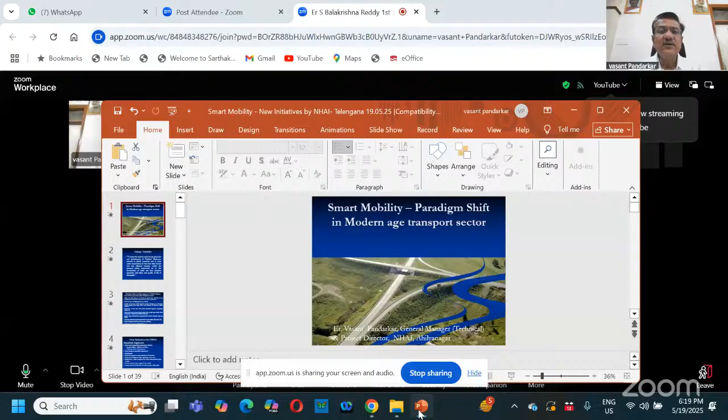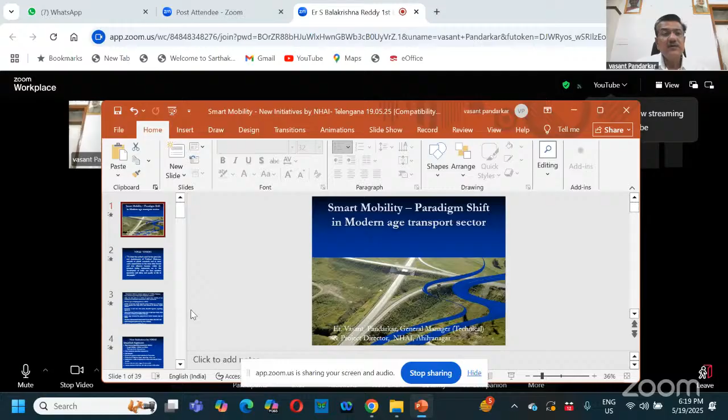Today's subject, as we have chosen, is smart mobility paradigm shift in the modern age transport sector. As I work with National Highways India, our vision is to meet the nation's need for provision and maintenance of the national highways network to global standards and to meet users' expectations in the most time bound and cost effective manner. This is the vision the NHAI chairman has put up to all the engineers of NHAI to work on this plan.

Now moving to today's subject, there is a paradigm shift in design aspects of NHAI projects. Earlier, when we worked with the PWDs and previous state PWDs, the main concern of designing was to minimize the project cost, to have minimum cost effectiveness. Also availability of land, availability of materials, and all other resources available, such as water and manpower. These are the main constraints we had to think of while designing projects.

If I think of project cost, we would go for right angle bridges instead of alignment angled bridges, so minimum length of the bridge should be considered, that's why the project cost would be down. We would go for alignments considering balance cut and fill, meaning whatever material I get from cutting, I would use in embankment portions. That's why I had to go through the alignment in contour fashion. More or less, we find sharp curvatures, sharp bends were also considered during earlier conception of highways. These are constraints we had to face, and accordingly we faced so many accidents, so many human losses on the highways because of these constraints.

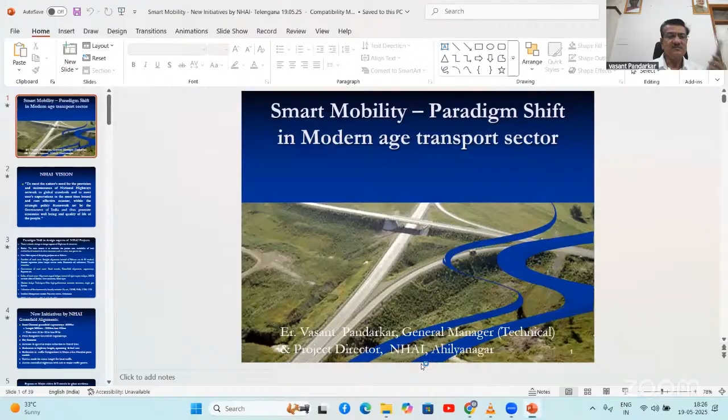Yes, so now I'm also seeing, and you are also getting it, full screen. Okay, so our first concern is to provide a design in such a fashion that there should be comfort to the road users. So our main asset is the road users, and their comfort is very important for the NHAI.

Accordingly, what we do is try to straighten the alignments as far as possible. If it is not possible, then we go for curvatures as per the IRC norm, that is, radius should be more than 500 meters. So it gives comfort to road users instead of considering the balance for cut and fill method, wherein we require more resources and more cost in designing. Instead, NHAI has decided we'll provide straight alignments and alignment bridges, to provide comfort to the customer.

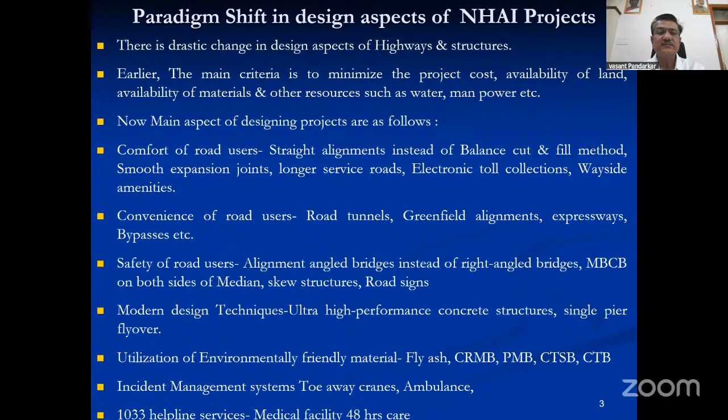New initiatives, as I said earlier in the earlier slide, greenfield alignments. So nowadays, under the Bharatmala and under some NHDP phases, NHAI has proposed greenfield alignments. So one of the projects I am associated with, or I am part of that design, is the Surat Chennai Greenfield Expressway. This project will start from Surat and connect to Chennai via the Greenfield Expressway.

It is totally greenfield and no brownfield. That means this new area is being acquired and constructed. The project cost is around 80,000 crore. Earlier, the length of this project was 1,600 kilometers.

However, after the construction, it will become 1,290 kilometer, providing a 310-kilometer reduction in the length itself. This length reduction will provide a saving in the fuel cost, saving in the operating cost of the transport section, and again it will save in the time itself. Nowadays it takes 32 hours to go from Surat to Chennai. Now time will reduce to 18 hours, that means 14 hours will be saved by the road users. So these are the key features now being provided by the NHAI itself.

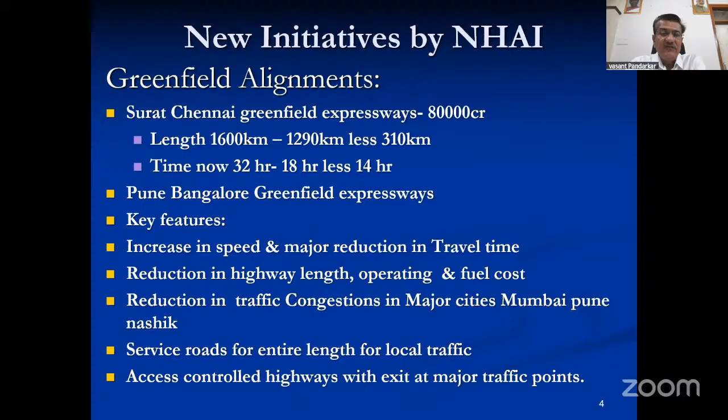So bypasses are being conceptualized under the NHDP Phase 7. The ministry has provided 700 kilometers of ring roads and bypasses, with an estimated cost of 16,680 crores. You will find that bypasses are being considered at very major cities. These bypasses are taken up by the ministry under central government funds, along with the acquisition of land. So it will reduce the traffic congestion within major cities and urban areas.

Again, it will provide another feature: cities will grow along these bypasses, as we have seen in Pune city itself, where earlier the bypass was considered away from the city itself. Now you'll see that the bypass came inside the city, and it has outgrown beyond that bypass. So new areas are being utilized for the growth of the cities also.

Tunnels, as I discussed, are being provided to avoid traversing the hilly portion and to provide easy access to all commuters, reduction in travel time, fuel cost, and major accidents. As I told, there are very frequent major accidents during the Pune district at the Khambataki portion. You will find so many major accidents during Pune to Mumbai also, and this provides reduction in pollution.

Longer flyovers. What happened actually is there is always a very large critique on the part of the NHAI that when we cross the city or smaller or medium towns, we provide some underpasses. These underpasses are around 30-meter wide, 40-meter wide, or 50-meter wide. But on both sides, we provide approach to these underpasses, and these are around 300 to 350-meter length on both sides. So there is a great difference of around 700 to 800 meters in the city.

You cannot cross, and this is in the main part of this area. So people always ask for flyovers so they can traverse from one side to the other, because shops and commercial organizations are there, and local people have to go from one side to the other. That's why there is a large demand from citizens for flyover type structures, and sometimes it is possible because of cost constraints, sometimes it is not possible.

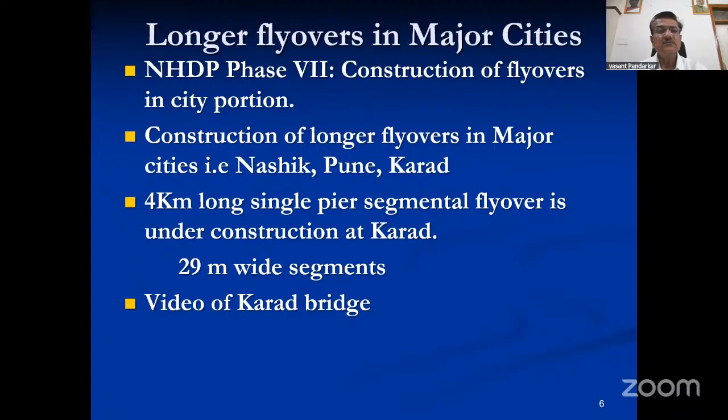Now a new technique is being used for design of the bridges itself - ultra high performance concrete is being used. This is a new technology, which is patented technology, came from Malaysia, and now we are using it here in India also. Earlier, we would go for 25 to 30 meter long bridge spans. Now, because of this ultra high performance concrete, they are manufacturing these bridges in the factory itself under controlled environment, and with this unique technique, they can go up to 70 meter larger spans, and because of that, columns are being reduced.

There is considerable increase in speed of construction. Though the initial cost of using these longer spans is around 30% excess, because they are using M50 to M150 grade concrete - very high density concrete with innovative techniques - longer spans give us reduced number of piers, reduced construction time, and reduced joints. It reduces the construction cost and time also.

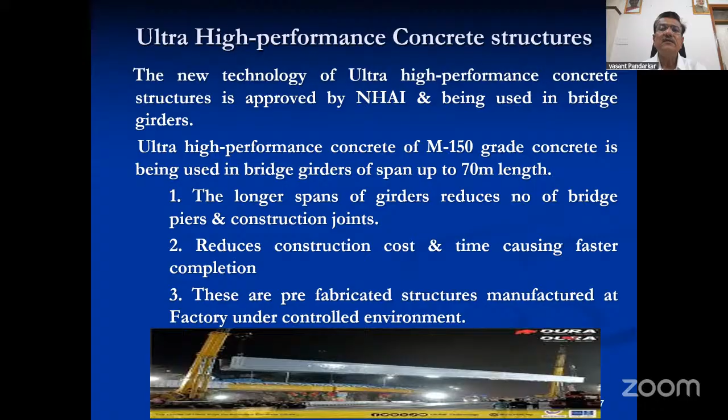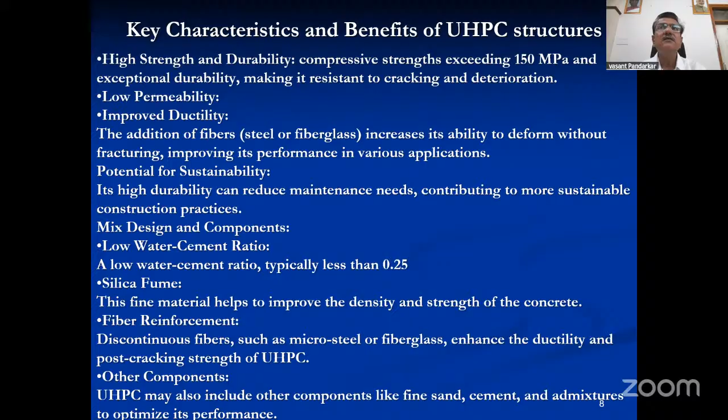Key characteristics of these UHPC structures: strength is high, as I already told you, it is 150 MPa, with improved ductility and potential for sustainability. Their design life is about 60 years, which gives durability for a longer time span.

In the mix design, a very low water cement ratio is used because they do not use conventional reinforcement - they use steel fibers and silica fume as aggregates, very fine aggregates, in manufacturing such structures achieving 150 MPa concrete, giving very high strength. So these girders are thin structures having very less weight, making them convenient for transportation and lifting.

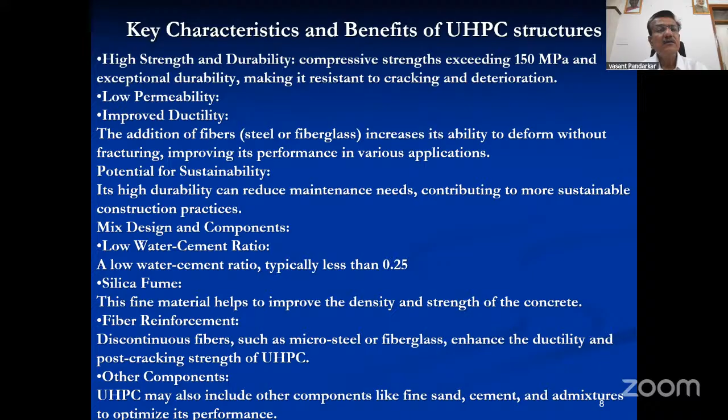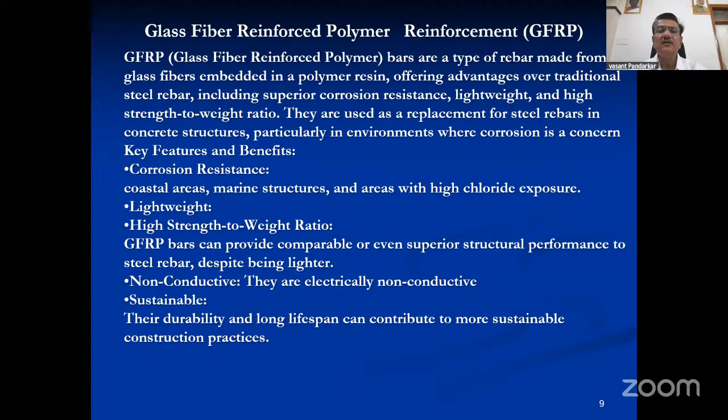Another new technique being used is glass fiber reinforced polymer. Nowadays, you may be aware of this reinforcement - glass fibers are used as reinforcement. These are corrosion free.

These are being manufactured at factories and supplied. Nowadays this is being used by NHAI in the Kolhapur to Belgaum section, but not as reinforcement - it is used in distribution and drainage structures, because they have good compressive strength but less tensile strength. That's why they are used in limited parts of the concrete, mainly in compression.

That means your distribution bars are being used in drainage structures also, and their bending stress is again very less. That's why they are trying to use them as main steel also. But these steels are very lightweight - a single person can lift 2-3 bars at the same time and carry them and use them on site itself. No corrosion, no special treatment is required. So these fibers are authorized for use by the IRC also.

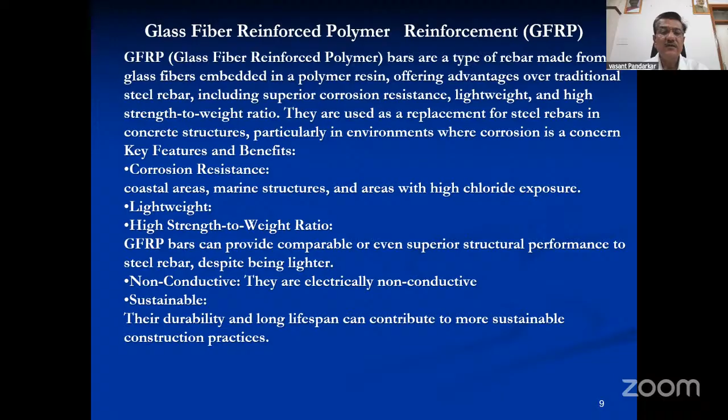Nowadays, instead of giving the NCR to the contractor directly by our offices, it is being delivered by the data lake itself, and they have to rectify within 48 hours. If they do not rectify, a penalty is imposed on the concessionaire automatically.

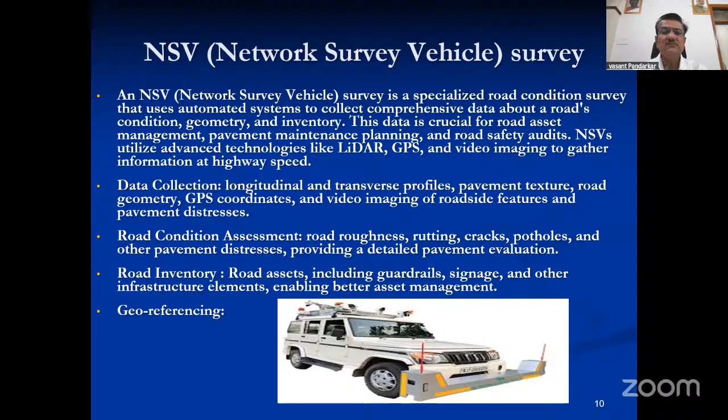Now this documentary proof is there showing what was done this month versus the earlier month. They provide both videos, last month's and the current one, side by side, and we ourselves can find the difference using the close-up images captured in these drone videos. We can find the road condition and what work has been done during the month itself. This is part and parcel of NHAI's regular monthly progress report, the MPR, and it has reduced litigation and further arbitrations and damage claims.

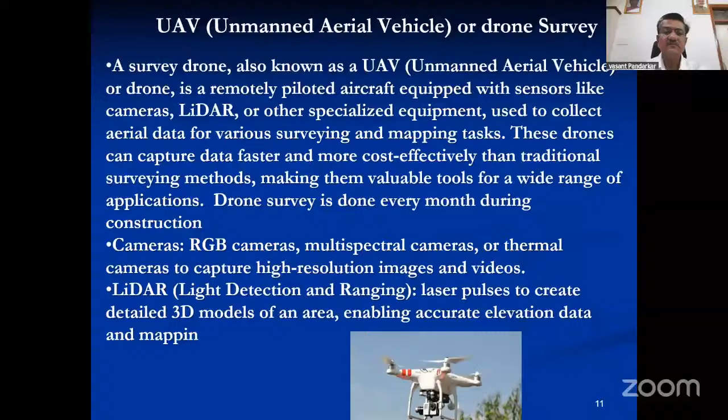Road safety is now a prime concern for our minister. He is very particular about this, and his motto is that we should bring down our casualty ratio to zero itself, but at least 5 to 10% lesser.

A committee is being constituted under the chairmanship of the collector of every district - the road safety committee. NHAI officers, PWD officers, the collector, SP of the district, and RTO are all part of this committee, and they meet every month. Public representatives, MPs, are the chairmen of this committee.

They give inputs on what is needed - there are some black spots, and they give solutions. They have some funds also, and they give the solutions. If not, then we give it to our headquarter. Our headquarter has given special funds to the accident black spot removals.

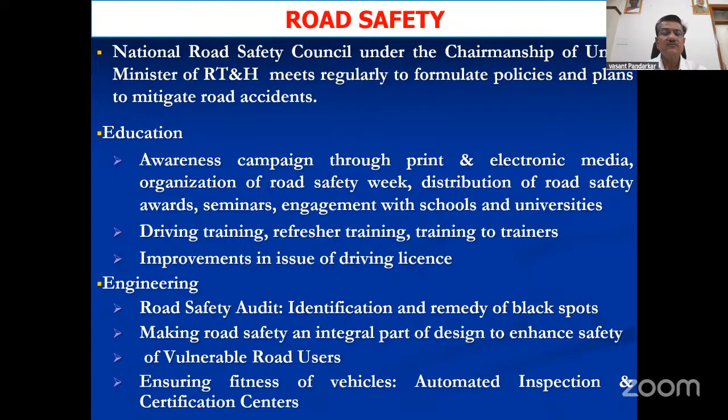Enforcement is a part of the RTO. They are providing speed guns, interceptors, and again, as project director, I am the road safety highway administration for the highways under my jurisdiction. So we have some quasi-judicial powers also, to impose fines on violators of road traffic.

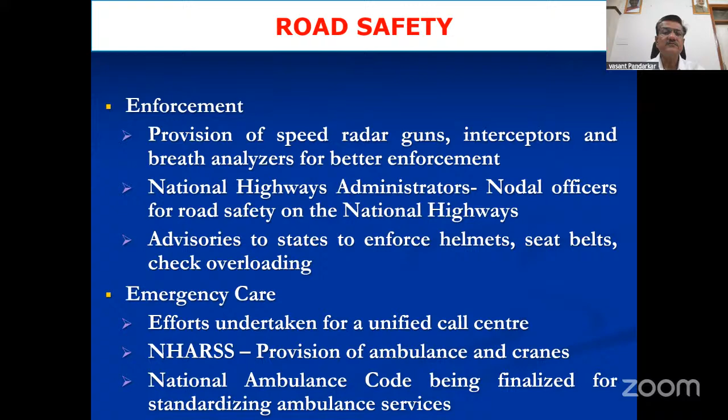Emergency - national ambulances are being provided. Emergency care is also there. Road safety awareness.

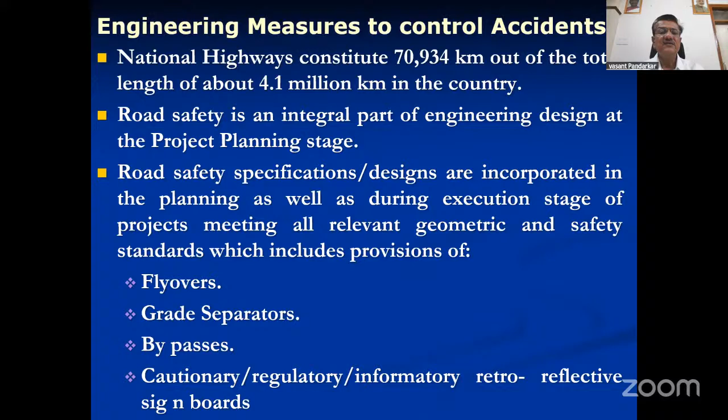So what we do is provide a grade separated structure - that is flyovers, grade separators, underpasses to segregate cross movement, cross traffic, and bypasses, as we have already discussed.

Railway overbridges - again, there is a memorandum of understanding between the National Highway Authority and the Ministry of Railways, that if we cross the railway line, we will remove the level crossing of the railway at the expense of the NHAI, to avoid any cross traffic of the railway and the highway. So we provide the ROBs.

They sanction our ROB, we construct our railway overbridges. At the same time, we additionally remove one level crossing within some 5 kilometers on both sides of the ROB, if it is there, at the expense of the NHAI, providing the facility for the railways to remove that. In return, they will not take any charges for our design approvals from the railway itself. So this is a both-way thing, railway and the NHAI.

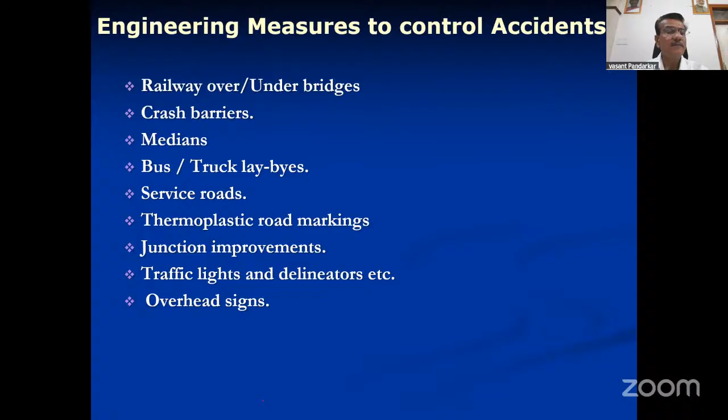Now this is the main concern - black spot removal. NHAI, or the ministry, has given a very large concern to the removal of black spots, and a protocol has been designed. A black spot is a short stretch of 500-meter length we consider, and if five accidents happen within 3 years, then it is declared a black spot by the ministry, or a single accident with more than 10 fatalities at the same point within a year. So it is declared by the ministry as a black spot.

There is a special provision for the improvement of these black spots by the ministry. Special powers are given to the regional officers - up to 50 crore are empowered to the regional officer to take up work to remove these black spots. Some funds are also given to the project director itself to take up safety measures at the black spots. So prime concern is given to this.

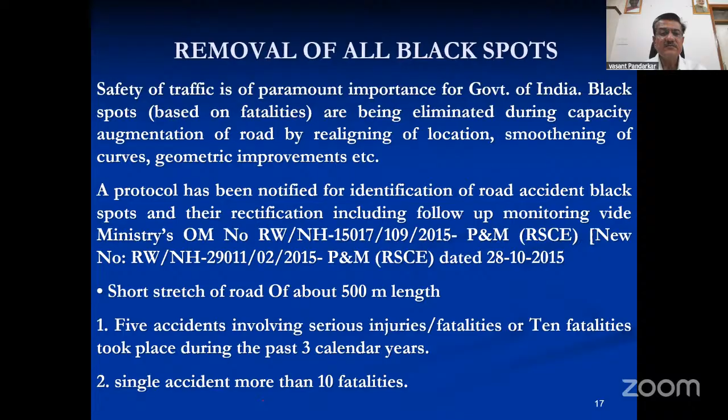A new technique called white topping is being used by NHAI. If we go for concrete pavement structures, it is a somewhat costly affair. Our national highways cost around 22 crore per kilometer, or nowadays 25 to 27 crores per kilometer.

So it is a costly affair. Instead, if there is an existing black top road and we want to provide good pavement to road users, we can go for white topping, because the base is already compacted and consolidated. No additional compaction is required. That's why with white topping we can go for thinner thickness. Earlier, for regular concrete pavement, we required 300 or 370 thickness.

Instead, we can now save and go for white topping with 180 thickness. For ultra thin, up to 100 we can use. This will save cost and construction time. But one feature is that panel size is very small, 1.25 meter by 1.25 meters, or 1.5 by 1.5 meters, to address the tensile stresses of these pavements.

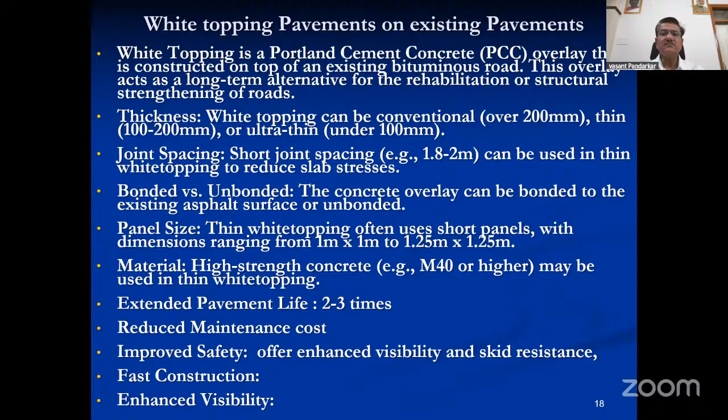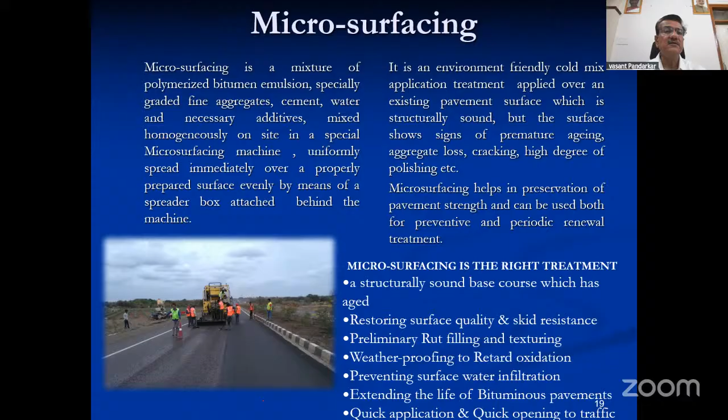Microsurfacing is used for removal of pavement distresses. If potholes or raveling are there, we use microsurfacing, a very fine technique. Bitumen emulsion and fine graded sand are used for this. It gives a good surface to traffic.

Now, electronic e-toll collection - for the last 2-3 years we have been organizing this, and now everyone is accustomed to e-tolling. Everybody has a FASTag and money is deducted from the FASTag itself. Now it is a settled thing. Earlier, when we started this 3 years before, we faced so many difficulties, portal difficulties, bank difficulties. Now it is running smoothly. Nowadays we have 94% or nearly 95% e-tolling.

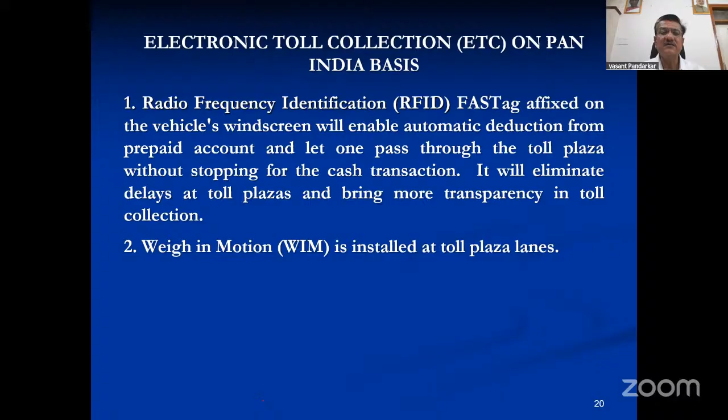Very rarely we use cash collection, but now the ministry has imposed that if you go for cash toll payment, you have to pay double charges. So people do not go for that. It is now a settled thing.

The use of spatial technologies - we have an MOU with the Indian Space Research Organisation for providing satellite pictures of our highways. It is useful for land acquisition. We can take out these pictures and identify structures affecting the alignment, and find out green cover and other things. It is useful for land acquisition and road condition development.

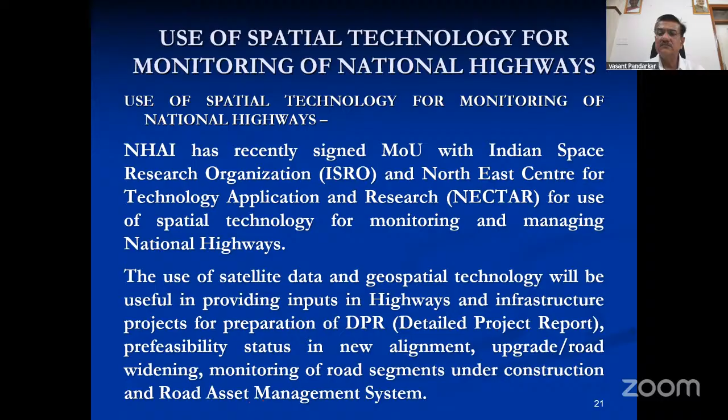Green highway policy was launched by the ministry on 29th September 2015. We provide median plants between the two main carriageways - a green cover of median plants of 1.5 meter height. Shrubs are monitored and maintained by NHAI, and we have avenue plantation. We plant 5 times the number of plants that we cut during construction, in special places we have acquired for this green cover.

These are the median plantations, as shown in this picture. It is duly curated by our plantation experts.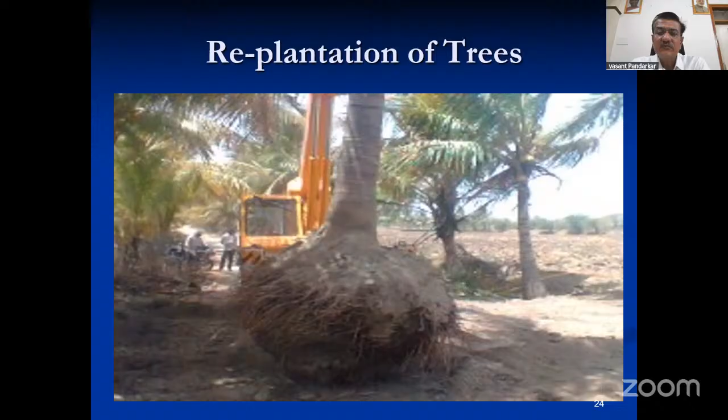This 1033 helpline is very unique. Everybody can use it. On the highway, we have put up information boards with the 1033 line. If you find any road user in distress, he can call 1033. It will go to our control room, which will connect directly to our officials, toll plaza officers. This will provide help - if there's an accident, an ambulance will be provided. If a vehicle is stranded on the road, they will provide a crane to remove it, and within an hour they have to respond. So this is a 24/7 unique helpline.

One more feature now added by the ministry is that if you meet with an accident, you call 1033, and the ambulance will come and take you to the nearest hospital. NHAI will bear the expenses for 48 hours of medication and all medical facilities. After that, the person will take special medical facilities in another hospital. So this is a new facility being added by the nation.

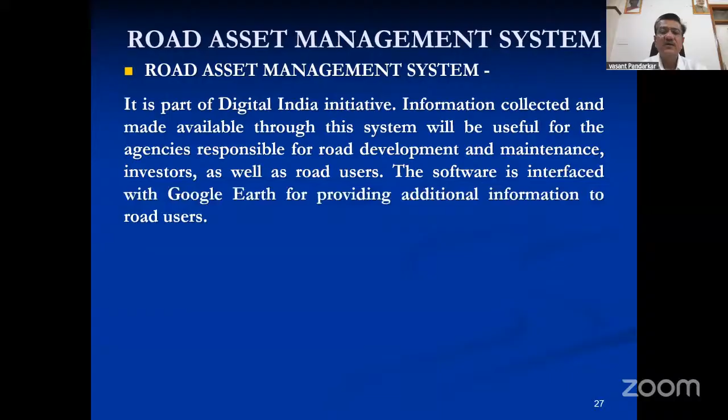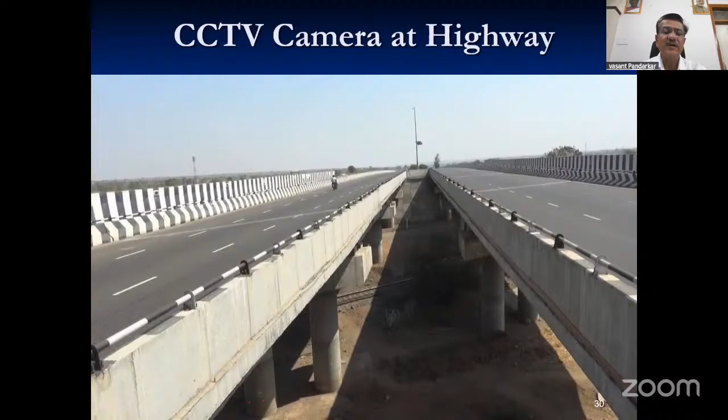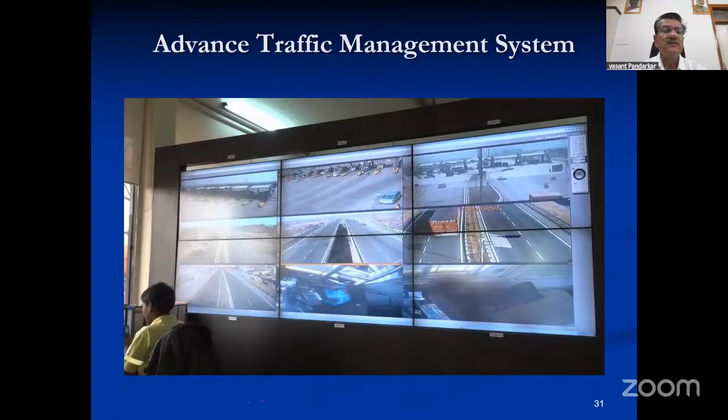This is the control room where all the data comes in, and they coordinate with all the other facility providers - ambulance, crane, and other things - directing them to attend to the situation at the site.